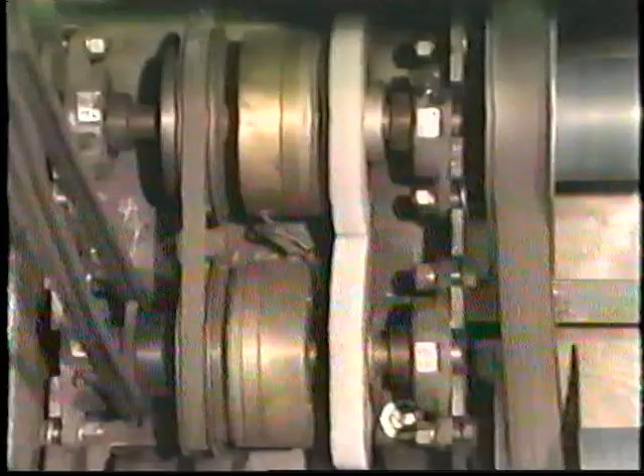The V-belt drive has been around since the early 1900s and is the most widely used drive in industry. Over the years, it has proven to be very reliable, relatively inexpensive, and easy to set up and operate. But if the V-drive is carelessly installed and maintained, these advantages can disappear quickly.

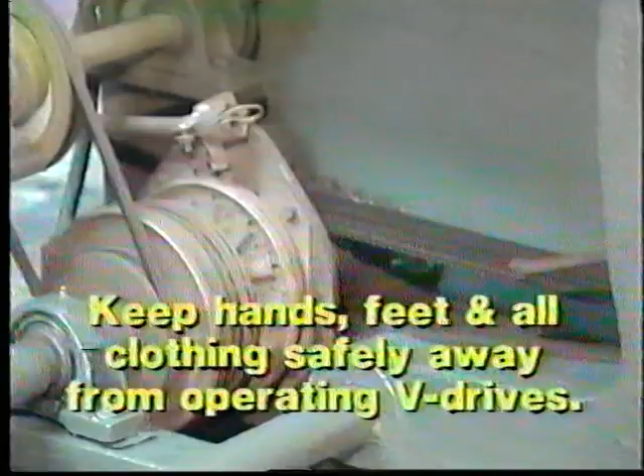We have removed a drive from the shop and brought it to an area where we can safely demonstrate its operating principles. Do not allow loose clothing, hands, or feet to stray near a drive that is operating or that could start without warning. Many people have been pulled into machinery.

Okay, let's take a look at how a V-belt works and why careful maintenance is important. The V-belt transfers power from the driver, usually an electric motor, to the driven equipment. Both the driver and driven equipment have pulleys or sheaves mounted on their shafts.

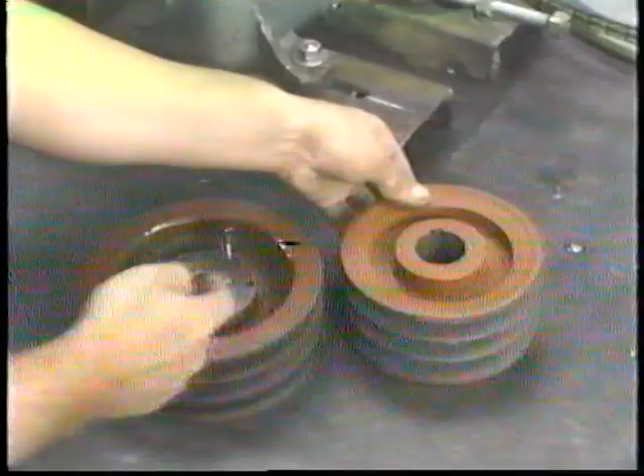Sheaves may have a fixed bore, which must be matched to the individual shaft, or they may be used with separate bushings which allow the sheave to be adapted to different shaft diameters. Let's take a closer look and see how a belt and sheave work together to transfer power.

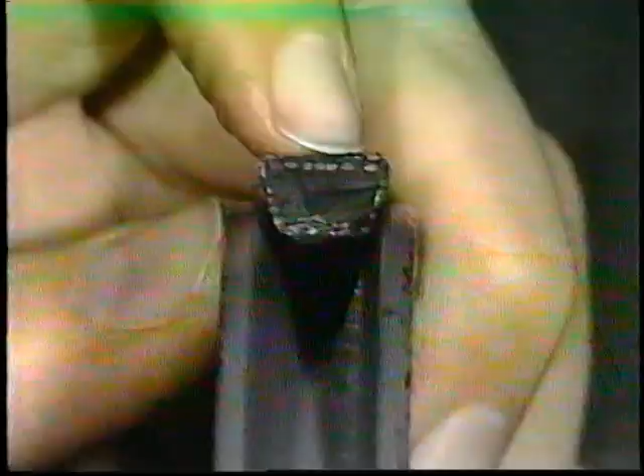A V-belt gets its gripping power by wedging against the sides of the sheave when the belt is forced down into the sheave groove. The belt is forced deeper into the groove by increasing belt tension. This is done by increasing the drive's center distance, which usually means moving the driver and driven equipment further apart.

Sometimes an idler is used to adjust the tension in a drive. By using the idler pulley to apply force to the belts, the effect is the same as moving the driver and driven equipment further apart. Both changing the center distance and moving the idler allow you to increase or decrease belt tension.

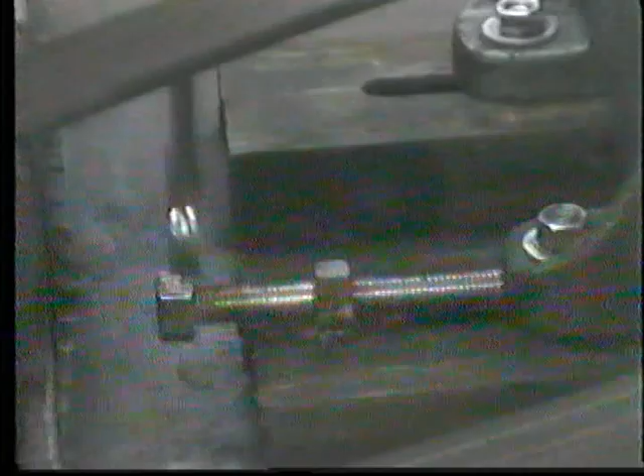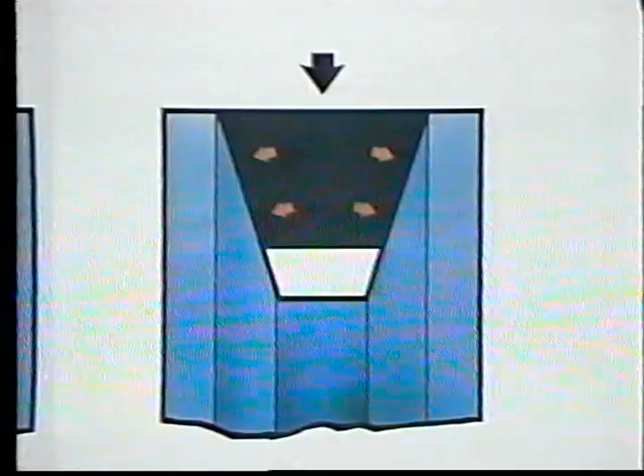When increased tension is applied to the belt, it will wedge deeper into the groove and push harder against the sides of the sheave. The harder the belt pushes against the sheave, the more gripping power there is and the less tendency there will be for the belt to slip when transferring power.

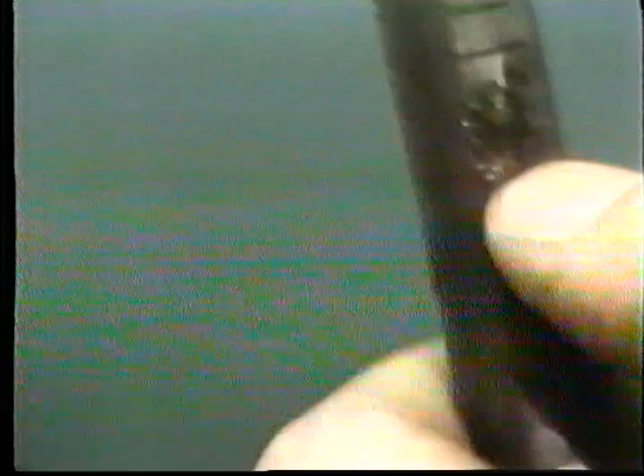If the belt does slip, the wasted power is turned into heat, which can break down the V-belt construction material and cause early belt failure. Belt slippage is by far the most common cause of belt failure and wasted power.

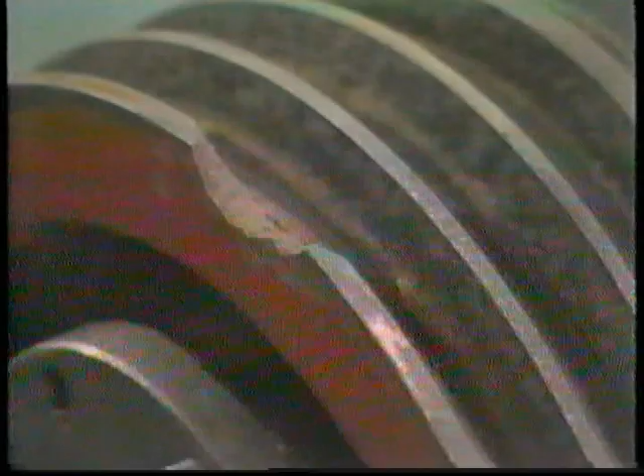But the condition of the sheaves and their alignment can also affect belt wear. If the sheave has burrs or rough spots, the belt will be gouged and will have a reduced service life. If the drive is misaligned, the load will not be distributed evenly across the belt. As a result, some parts of the belt will wear faster than others, and the belt will fail sooner than it should.

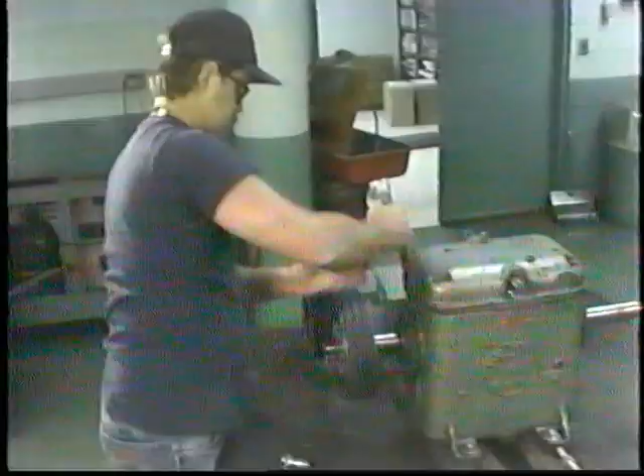Okay, it is important to understand that a V-belt's gripping power is directly related to belt tension. If we want to transfer a certain amount of power without the belt slipping, we need to provide the right amount of belt tension. Suppose that this drive needs a total of 210 pounds of tension to transmit power without belt slippage. Since there are 3 belts, this means that each belt needs to supply 70 pounds of tension.

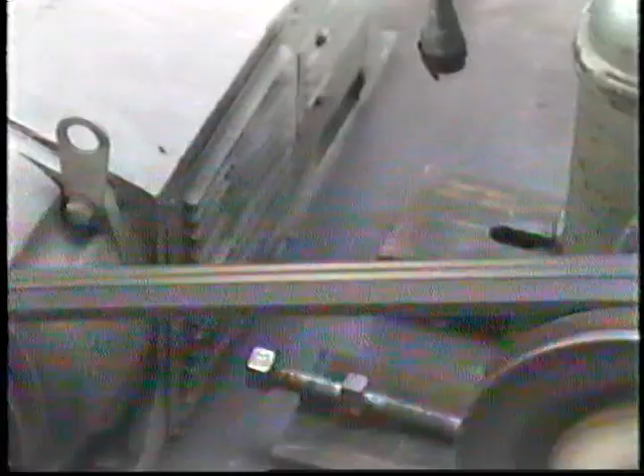When one of the belts is worn and can no longer withstand 70 pounds of tension, it fails. And when it does, the 2 remaining belts will still be supplying only 70 pounds of tension each. And since 140 pounds of total tension is not enough to turn the driven unit, the belts will begin to slip. Now, in this situation, there are 3 ways to come up with the necessary 210 pounds of total tension.

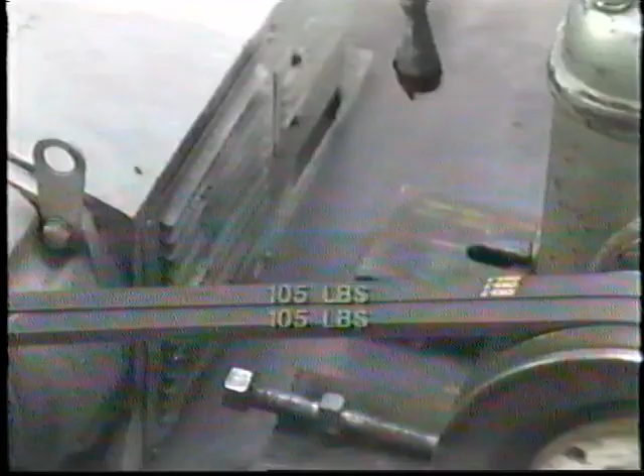First, if you're in a hurry and also want to get every bit of service from the belts, you could simply retension the 2 remaining belts. But they must now each supply 105 pounds of tension to make up for the missing belt. And chances are they weren't designed to take the extra load. Plan on some future downtime because they will probably fail soon.

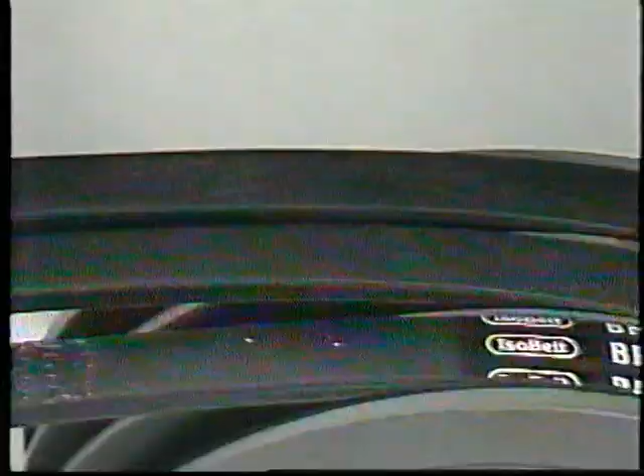Secondly, you might be tempted to simply add a new belt to the drive. But when the new unstretched belt is tensioned, the old belts, which have stretched, will be hardly tight at all and will transmit very little power. The new belt will have to bear most of the load.

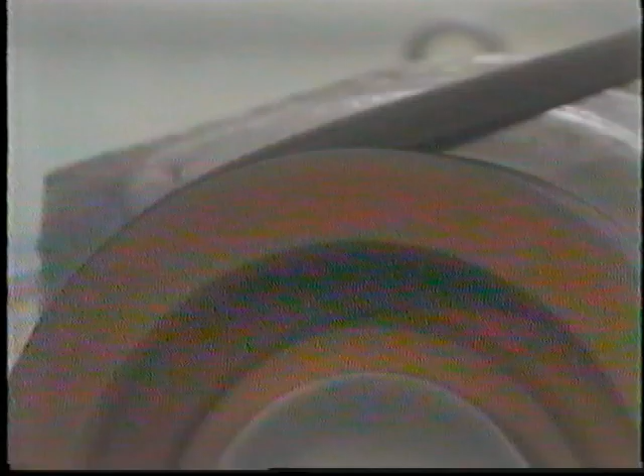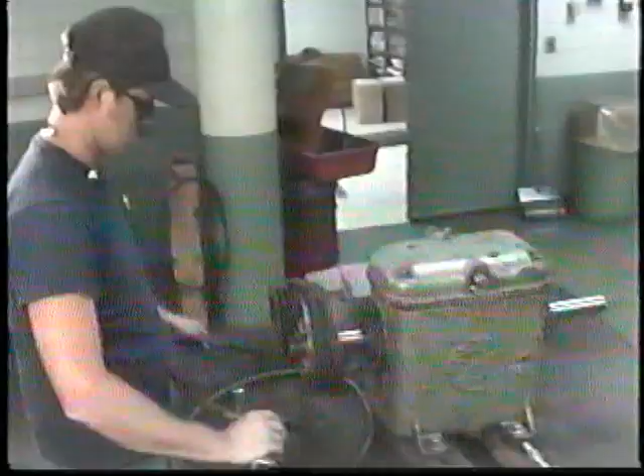If you tension the new belt normally, the drive will have little more than 70 pounds of total tension, and the new belt will certainly slip. If you try to eliminate the slippage by over-tensioning, the new belt will have to provide the entire 210 pounds of tension. In either case, the new belt will fail quickly, and you'll be back to where you started. The third possibility, changing all the belts, often turns out to be the most practical.

If the belts are replaced as a set, they should all wear at about the same rate, and each will be pulling its share of the load. In the long run, you can reduce the number of times a drive needs to be shut down for belt replacement if the entire set is replaced.

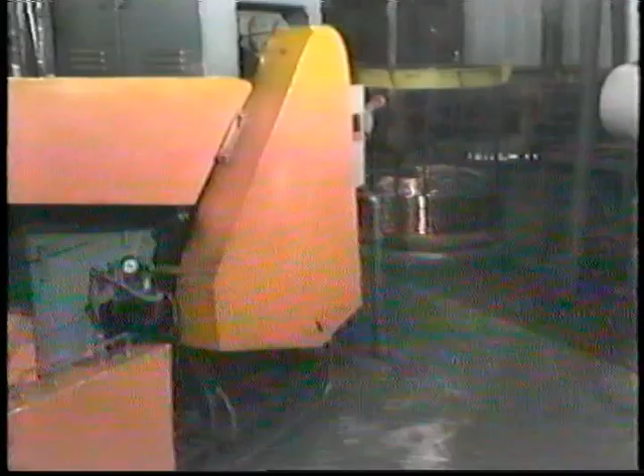Now, as we replace the set of belts on this drive, we're going to pay close attention to the sheaves and their alignment. Then we will concentrate on tensioning the belts correctly. Some of the procedures we will show may be difficult to perform on some of your drives, but if you are able to adapt them to your situation, your efforts will pay off in increased belt life and reduced downtime.

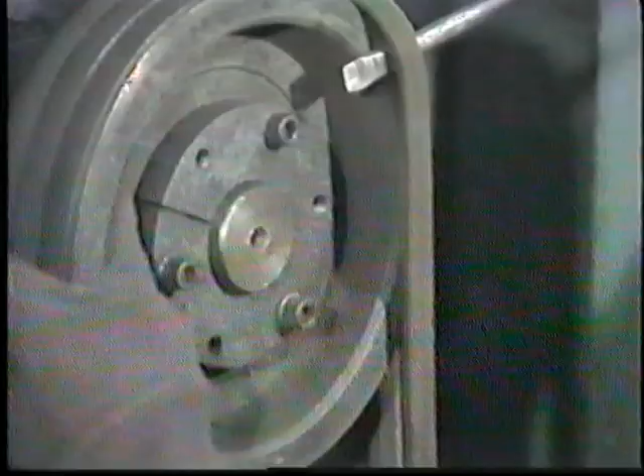The first step, before doing anything else, is to shut off the drive and electrically lock it out. Then make sure to remove the old belts correctly. Never pry the belts off with a screwdriver, which might slip and injure you. Instead, shorten the distance between the sheaves until the belts can be slipped off easily by hand.

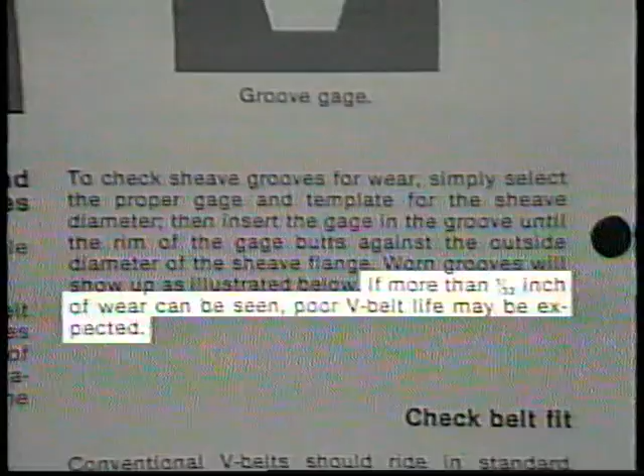As we've said, it's important that the sheaves be in good shape. Check to see if there are burrs or anything else on the sheave groove which might damage the belt. Using a gauge, which is often available from your vendor, check sheave wear to make sure the groove is not dished out and allowing the belt to slip. Follow the manufacturer's recommendations for how much wear is acceptable and when the sheave must be replaced.

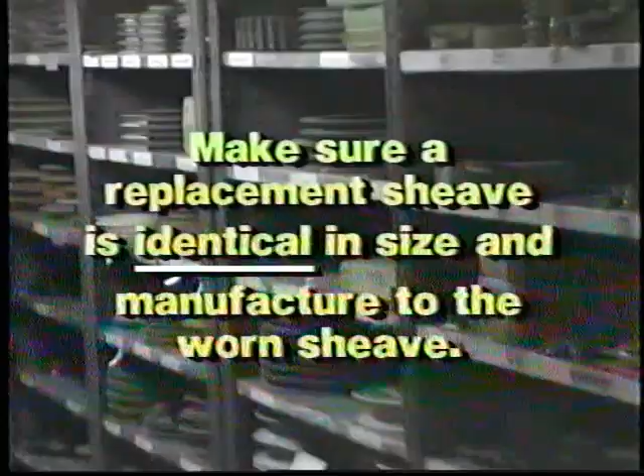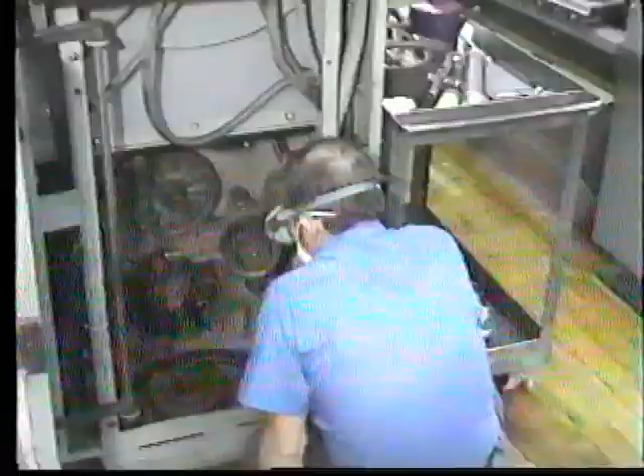Just because the sheave is new, don't assume it's in perfect shape. Check the inside of the sheave hub and the groove for defects. Also, if you're using a bushing, take a look at its tapered surface to make sure it's smooth and won't damage your sheaves. With the key in place, slide the sheave and bushing along the shaft and place the unit where it looks like it will be aligned properly with the remaining sheave.

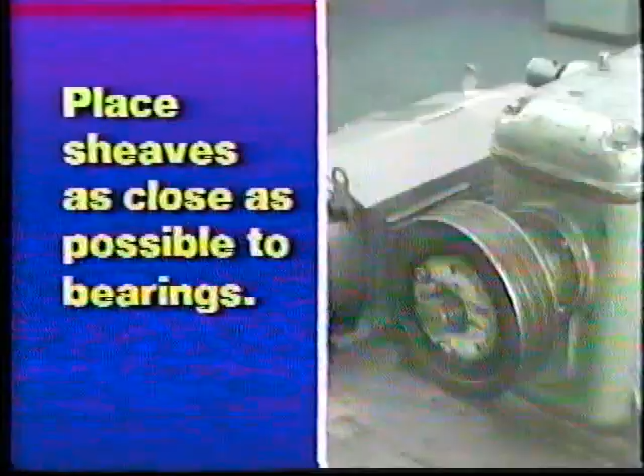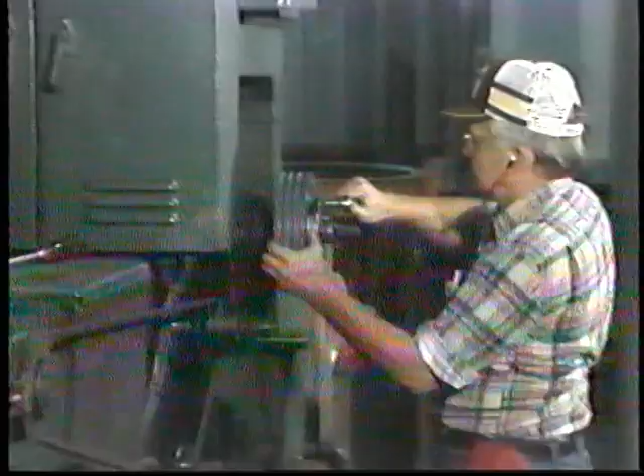If both sheaves were removed, use these two general guidelines for sheave placement. First, the sheaves must clear the rest of the machinery and the belt guard. Secondly, the sheave should be placed as close to the bearing as possible in order to reduce overhung load. Overhung load refers to the lever effect on the bearing if a sheave is placed far out on the shaft. If you have any doubts about placement, it's usually safest to place the sheaves along the shaft exactly where the old ones were. Then snug up the mounting screws.

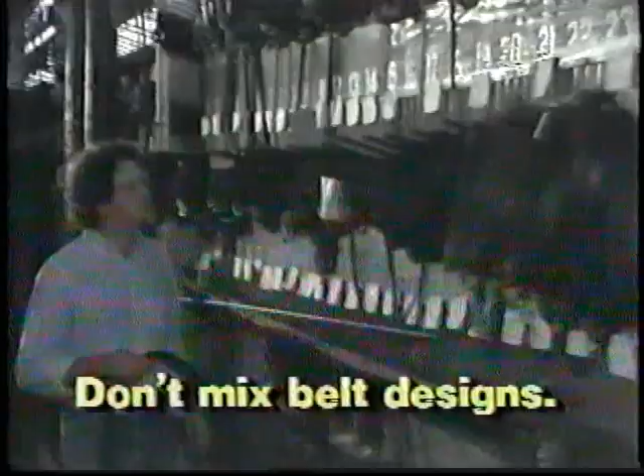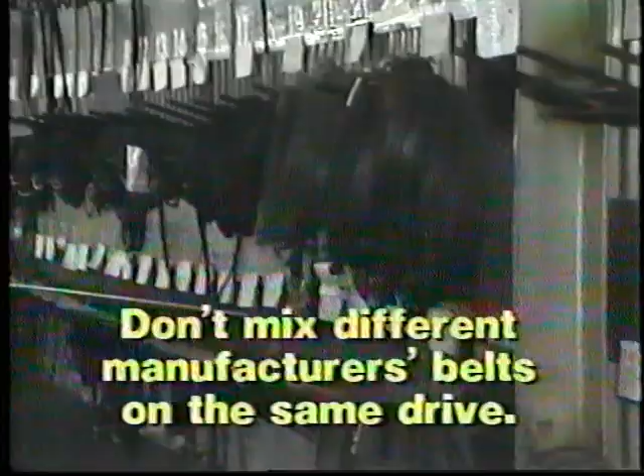Now, before we go on to aligning the drive, let's see how to make sure you'll be putting on the right belts. When selecting replacement belts, there are three important things to avoid. First, don't mix belts of different design on the same drive. Secondly, don't change one belt design for another without checking with your supervisor. And finally, don't mix different manufacturers' belts on the same drive, even if they appear to be the same size and of the same design. It is safest to replace worn or failed belts with new belts which have the same identification markings.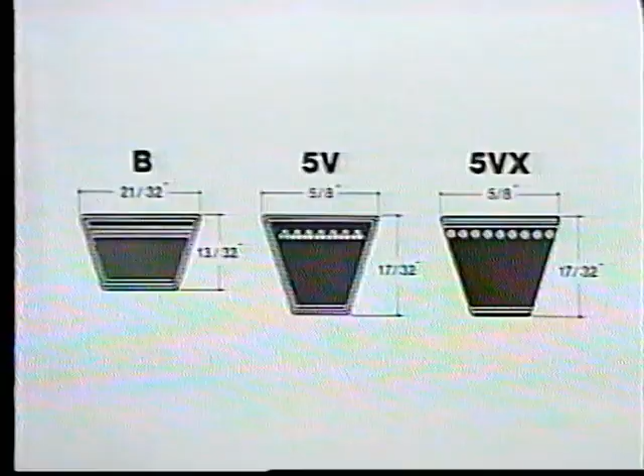Let's take a moment to look at some of the differences in design and construction that you might run into and why it's important to install identical replacements. There are three common belt designs: the conventional or classical belt, the narrow belt, and the raw edge belt. The conventional belt is still the most common and is sized A through E. The narrow belt has a thicker profile than the conventional belt and has a V in its number. Narrow belts are sized 3, 5, and 8. Narrow and conventional belts are not interchangeable. In fact, the narrow belt requires a different sheave for its use.

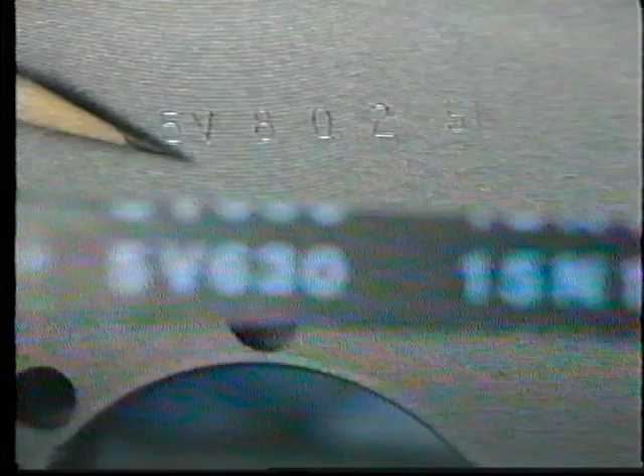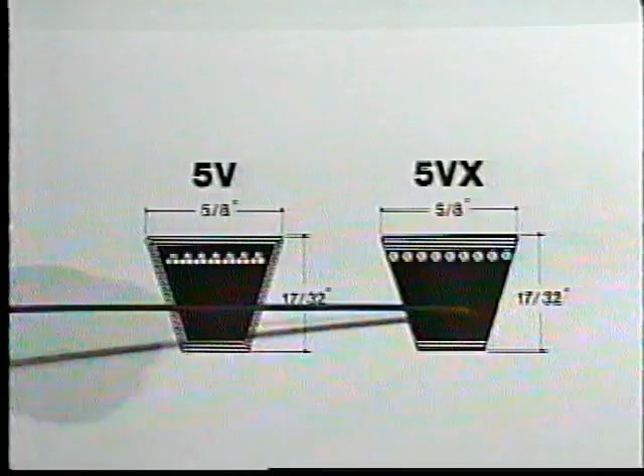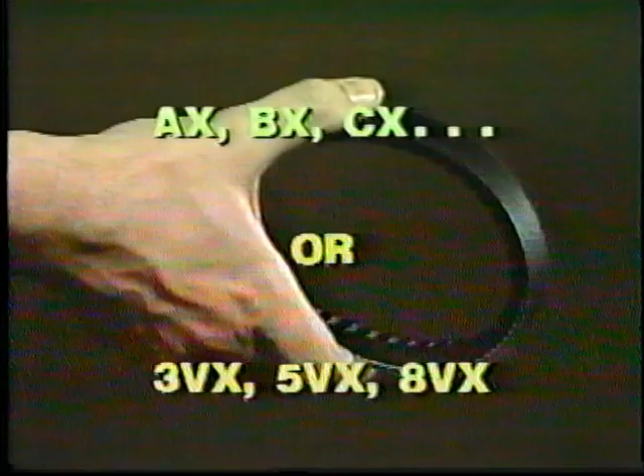Both conventional and narrow belts have an outer jacket made of rubberized cotton or man-made fibers. This jacket helps protect the belt from abrasion and from occasional contact with oil. Raw edge belts, on the other hand, do not have this protective covering all the way around the belt. Instead, they often have a greater load capacity and bend more easily around small sheaves. These belts are sized to fit either conventional or narrow belt sheaves and have an X in their ID number. Because raw edge belts do not have a protective cover, they may be more easily affected by their operating environment.

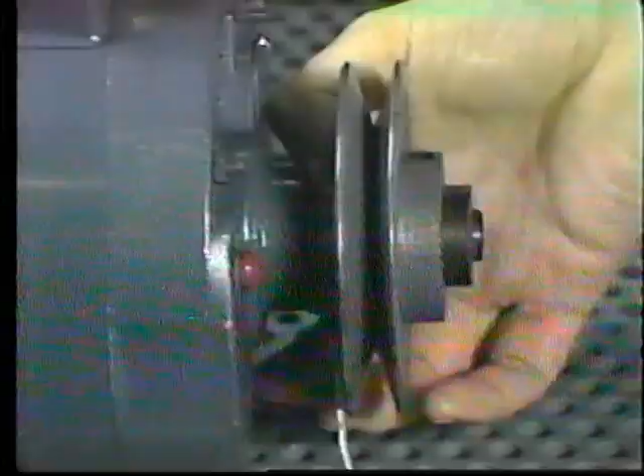A final and very important reason not to mix belt designs or belts from different manufacturers is that they may require different amounts of tension. The result may be that when placed on the same drive, some belts may be over-tensioned while others remain under-tensioned. Now, when it comes to aligning the drive, if possible, perform the alignment before torquing down the cap screws and installing the belts.

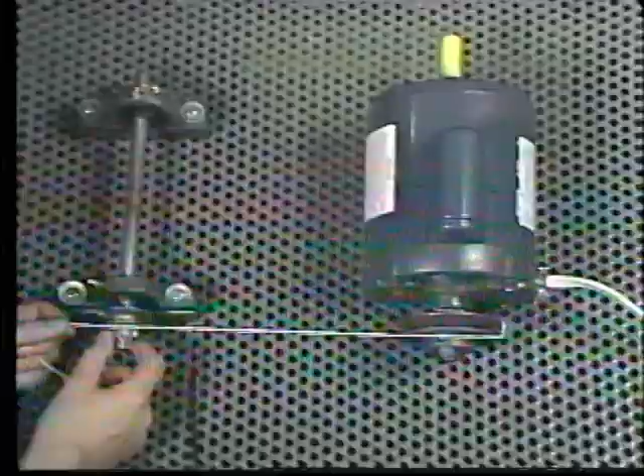First of all, this will allow you to make small alignment adjustments to a sheave instead of moving the driver and risking a major realignment. Second, the alignment process is usually easier if you don't have belts pulling against the sheave while you're trying to move it. But in some situations, the driver must be moved back to its operating position before the alignment will be close enough to check.

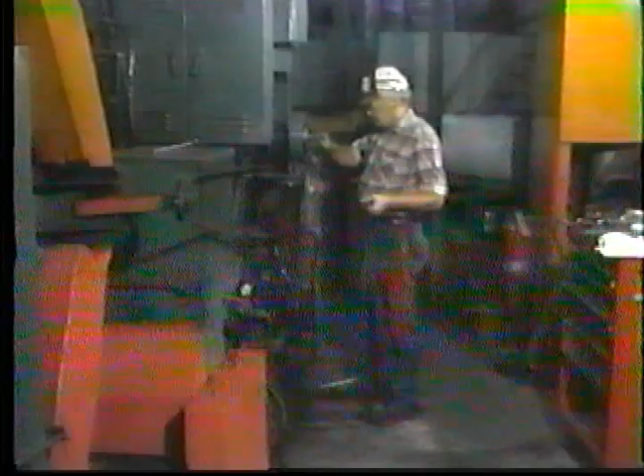So you'll have to put the belts on first. In this case, torque the sheave cap screws to the manufacturer's specifications. Then put the new belts on while the center distance is shorter. In fact, you may find that even though you have already shortened the center distance to remove the old belts, you may have to further adjust the drive.

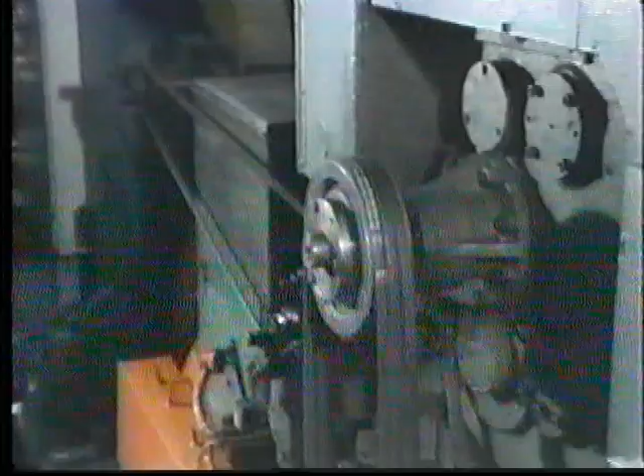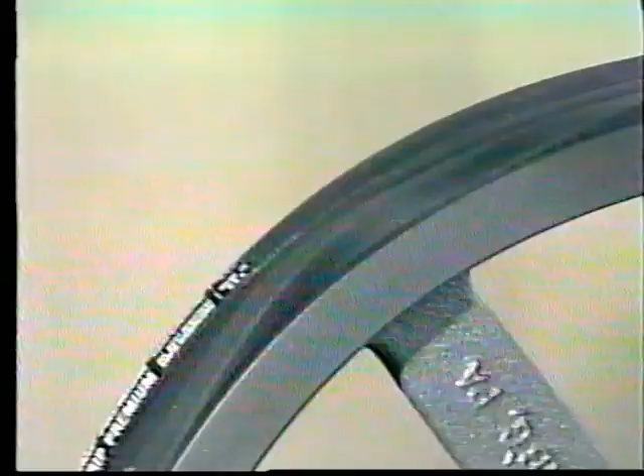In order to slip the new, unstretched belts over the sheaves by hand. It is absolutely essential that new belts not be forced onto a drive by using a screwdriver or any other means. If the belts are forced on, there's a good chance the tension cord in the belt will be damaged in the process. Tension cords carry the load and provide the belt's strength. If the cord is damaged or stretched when installing, the belt quickly becomes useless. Belt turnover is often caused by broken or damaged tension cords.

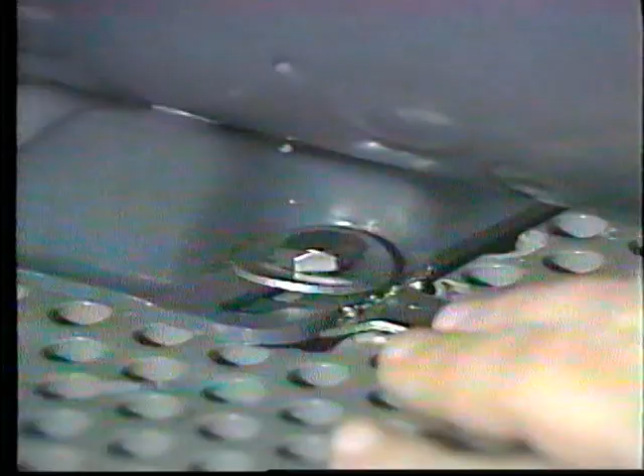Now, one of the advantages of the V-Drive is that it does not require exacting alignment techniques, which is a good thing, because aligning a V-Drive perfectly can be very tricky. But it's worth the time to come as close as you can. The better the alignment, the longer your belts, sheaves, and bearings will last.

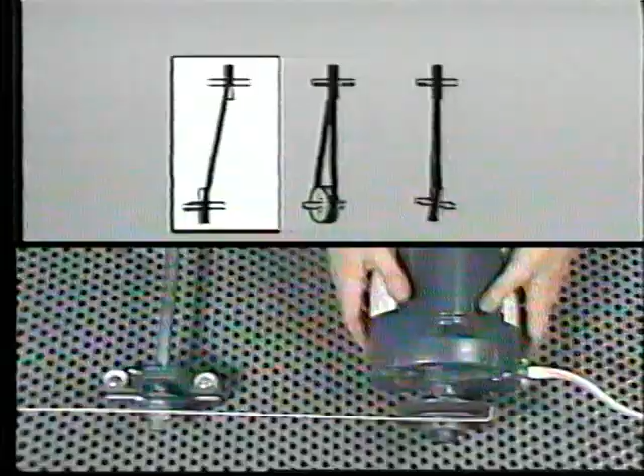These are the ways a V-Drive can be out of alignment. Usually, misalignment will be a combination of them. To correct for this kind, you'd move the motor forward or backward. For this kind, you'd shim the front or back. And for this, you'd rotate the motor.

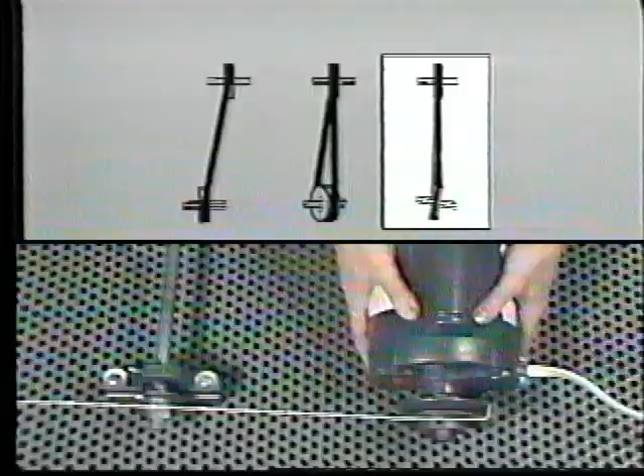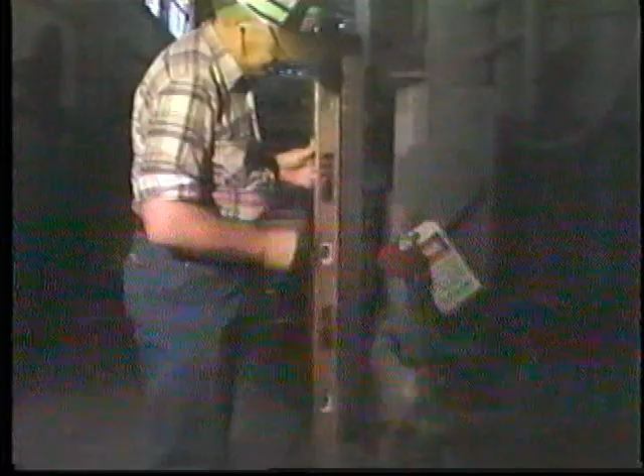To check the alignment, place a straight edge across the faces of the sheaves as near their centers as you can. The straight edge should touch the two outermost spots on each of the two sheaves. If it doesn't, move the motor in the proper directions to get the straight edge touching the sheaves properly. Then repeat the procedure on the other side of the hub. For example, if you took your first reading to the right of center, now do it again to the left.

If the straight edge does not touch the sheaves properly now, you will have to try another adjustment. Keep repeating this procedure, checking each side of the center and adjusting the motor until the straight edge touches correctly on both sides of the hub.

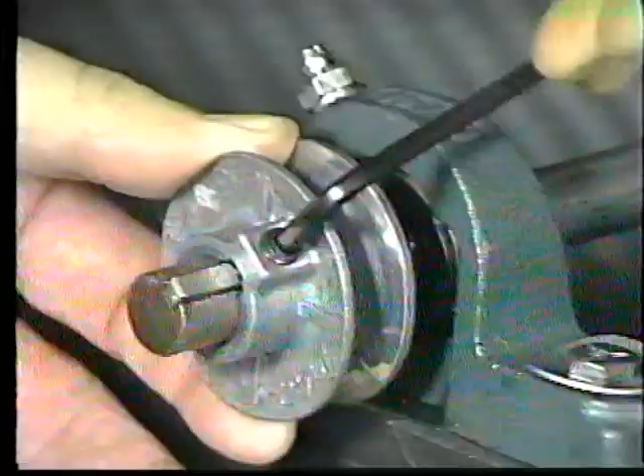Finally, rotate the sheaves a half revolution. The straight edge should still line up properly. If not, you probably have a wobbly sheave or even a bent shaft. When you're satisfied the drive is aligned, tighten down the motor hold-down bolts. Then torque the sheave cap screws to the manufacturer's specifications if you have not done so already.

Now we are ready to tackle the single most important V-Drive maintenance procedure: applying the correct belt tension. If you don't get this right, much of your effort up till now will be wasted. From what has been said so far, you might think that the tighter the belt, the better. After all, the greater the tension, the greater the gripping power.

But unfortunately, belt tension also affects the bearings found in the driver and driven equipment. Increasing the belt tension not only increases gripping power, it also increases bearing strain. The farther the shafts are forced apart to increase belt tension, the more the belts are going to pull on the shafts and against the bearings.

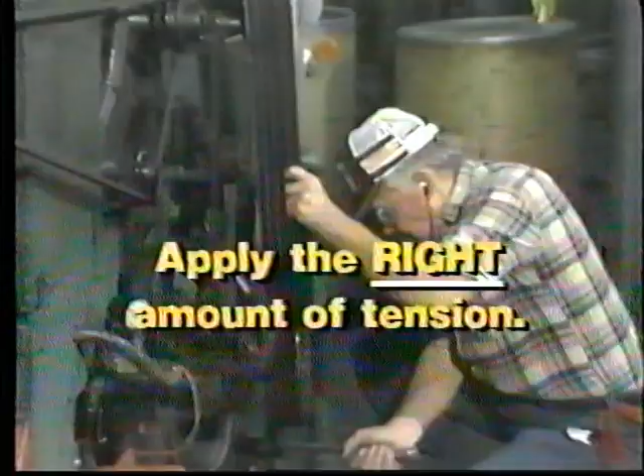The correct belt tension strikes a balance. The belt needs a certain amount of tension in order to transfer power without slipping, but not too much or the bearings won't last. The trick is to apply the right amount of tension to the belt, not too much and not too little.

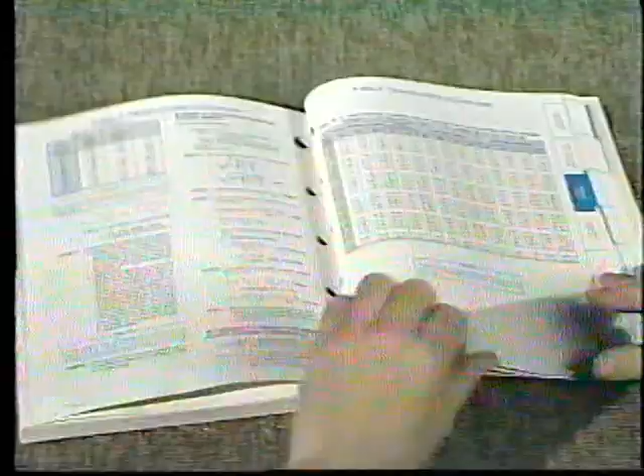You have already seen a couple of the more popular methods of coming up with the right belt tension. There are several other methods. Some of them work better than others, but they all depend on years of experience. The problem is, even experienced people may have trouble adjusting their methods to the greater tensions that must be applied to today's belts, particularly the narrow and raw edge belts. Many belt experts have different opinions on the second best way to come up with the right belt tension.

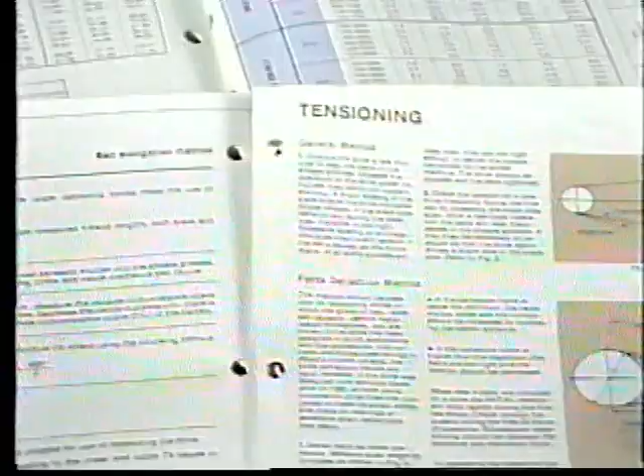But they do agree that the best way is called the force deflection method. The force deflection method makes use of formulas which relate the actual belt tension required to transmit a load to the amount of force it takes to deflect a belt after it has been installed and tensioned. Fortunately, most manufacturers have done the math for you.

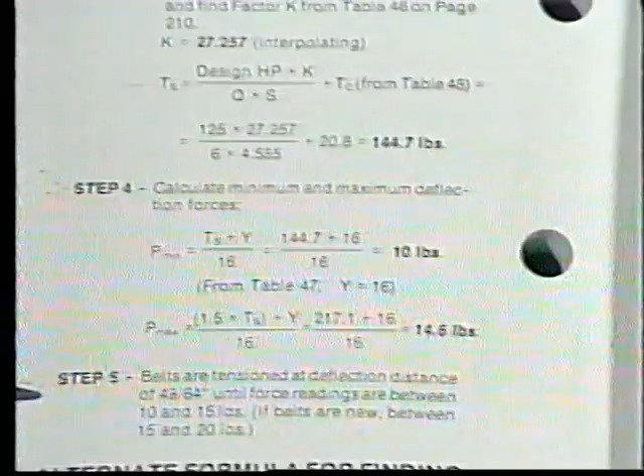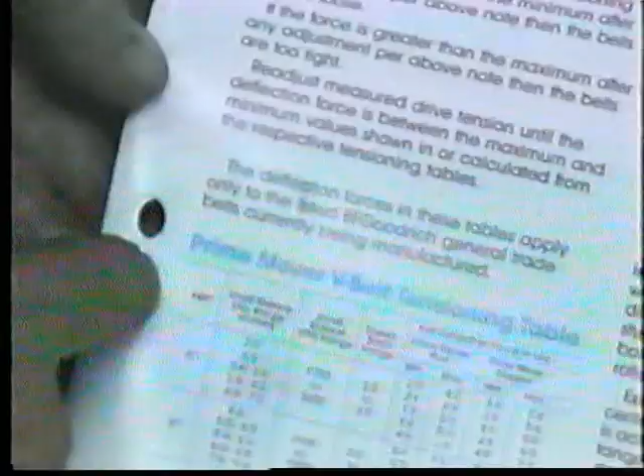You will need a tape measure, a spring scale, and the belt manufacturer's instructions. Carefully follow the manufacturer's instructions and make sure that they actually apply to your situation. Before using the force deflection method and the manufacturer's charts, you must be certain that the correct type and correct number of belts are being used on your drive to avoid overloading the bearings.

If for any reason you cannot use the force deflection method, contact the manufacturer directly for the proper way to tension your drive. When you can use the force deflection method, the procedure will usually follow this general pattern.

First, apply a preliminary amount of tension. A good rule of thumb is to apply enough tension so that the belts have a live, springy feel when struck with a hand or pushed down with a thumb.

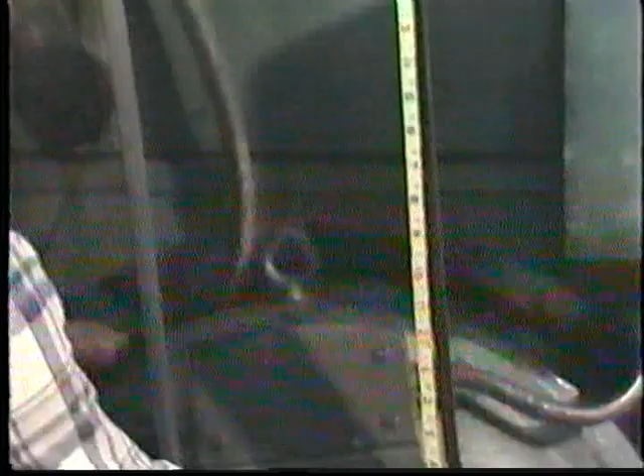Then measure the belt span length, the distance on the belt between the two points where the belt first contacts each sheave. You're measuring to the nearest inch, so don't worry about finding the exact contact points.

Now we'll use the span length to find out how much we're going to deflect the belt to get the right tension. Using a spring scale, apply enough force in the center of one belt to deflect the belt 1/64 of an inch for every inch of belt span.

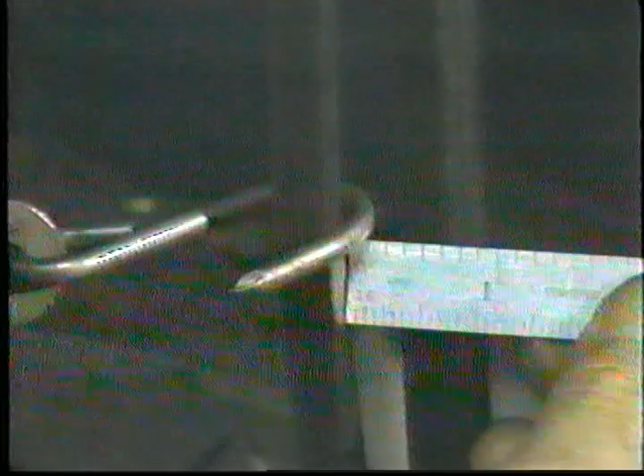If the belt span came out to be 32 inches long, then move the belt 32/64, or 1/2 inch, with the spring scale. Read the amount of force it takes to do that on the scale.

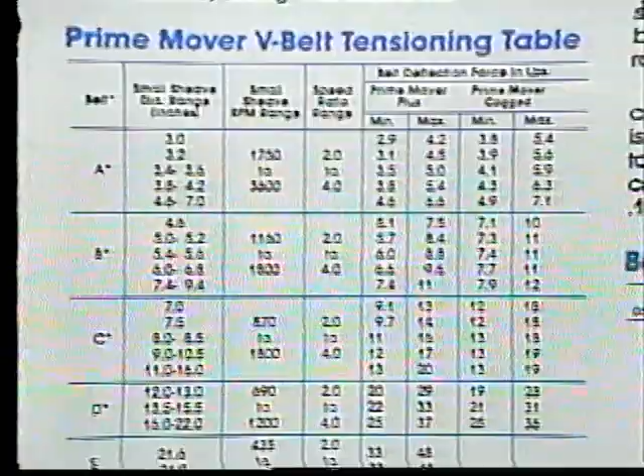Then compare this reading with those suggested by the manufacturer. As you can see, the chart will often give a range within which your reading should fall.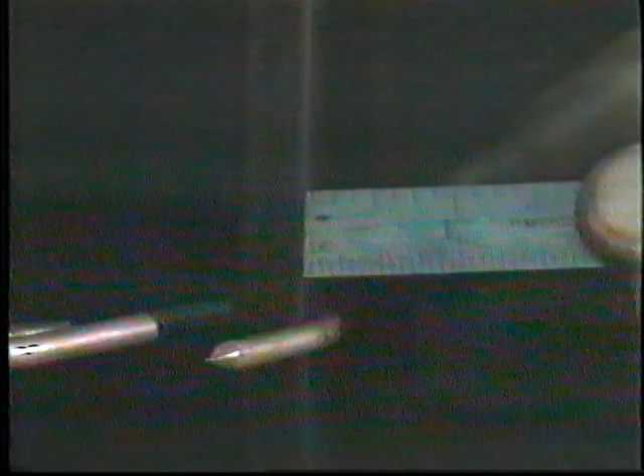By changing the distance between the sheaves, adjust the tension to fall between the values given by the manufacturer. Depending on the drive setup, you may need to adjust a motor mount screw. But if you have to loosen motor base bolts to apply tension to the belts, the job is going to be tougher because retensioning may affect the alignment.

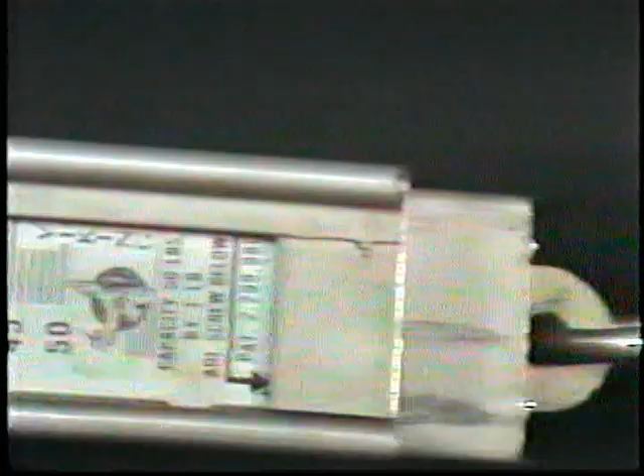Regardless of which mounting method you are using, once the proper tension has been set, make a final alignment check. When you're satisfied with the alignment and belt tension, remember to replace the belt guard before starting the drive.

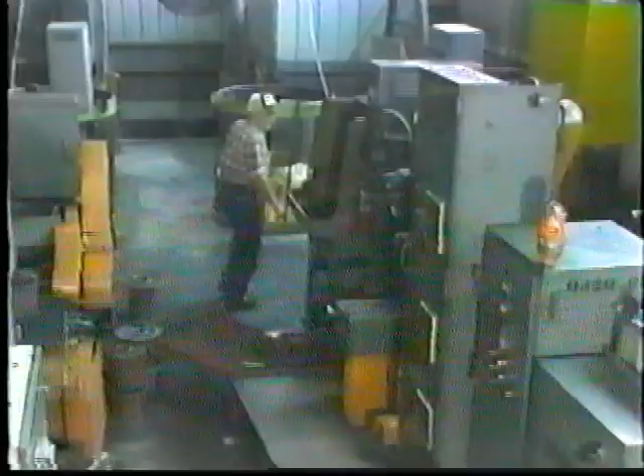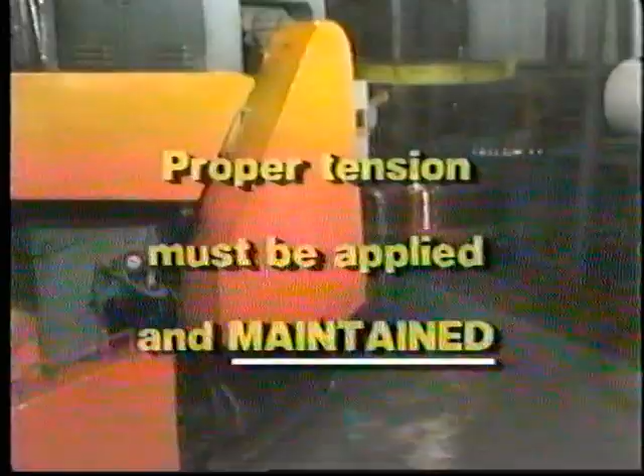Now you've inspected the sheaves, the drive has been aligned, and the belts have been properly tensioned. Much of the job is done, but it isn't finished. Once seated and under a load, the belts will now stretch and the tension will be reduced. If the V-drive is to do its job without wasting power and wasting belts, proper tension must not only be applied, it must also be maintained.

Belts will stretch the most in the first few hours of operation. Listen for belt squeal. If they are squealing, the belts are slipping because they're too loose. Stop the drive, lock it out, and tighten the belts.

Do not use belt dressing to quiet them. Belt dressing can break down the belt material without solving the problem. Slipping belts need to be tightened, not dressed.

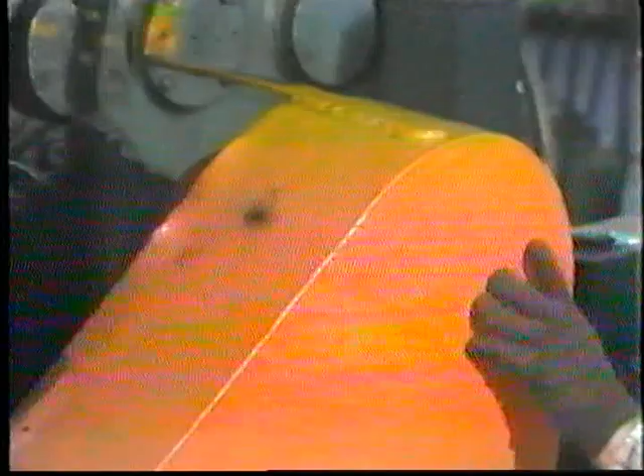After 24 hours, check the tension and retension the drive if necessary. Then check the tension again after 72 hours of operation. It's a good idea to make an occasional check even after that. The belt may still have up to 3% more stretch after the 72-hour break-in period.

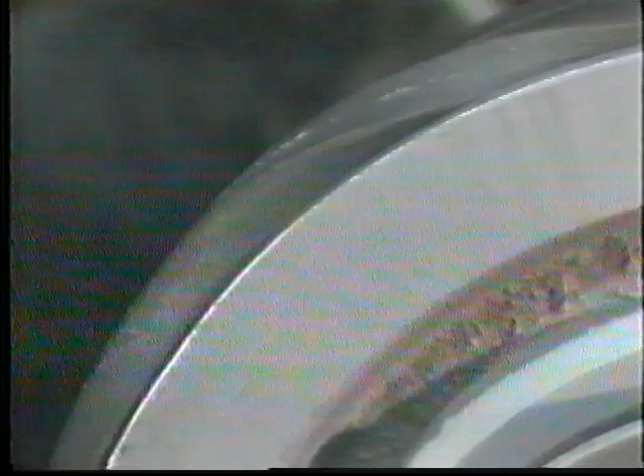Now, before we're through, let's see how we might troubleshoot a drive that's going through a lot of belts very quickly. If you're having a lot of trouble with belt turnover, there are two probable causes. First, someone may have changed the drive requirements without adding extra belts to carry the extra load. Sudden shock loads can cause belt turnover when there are not enough belts to provide enough tension in the drive.

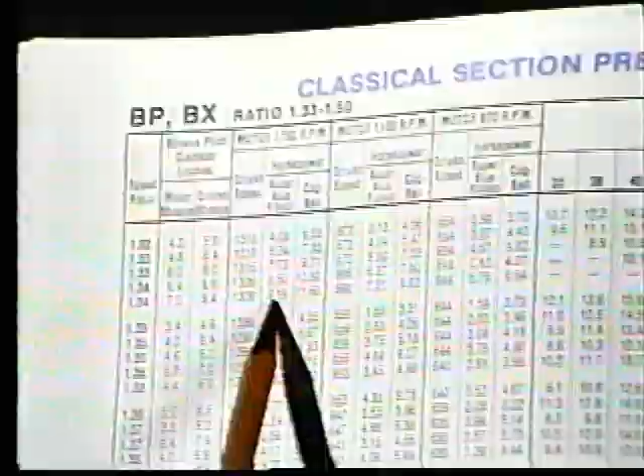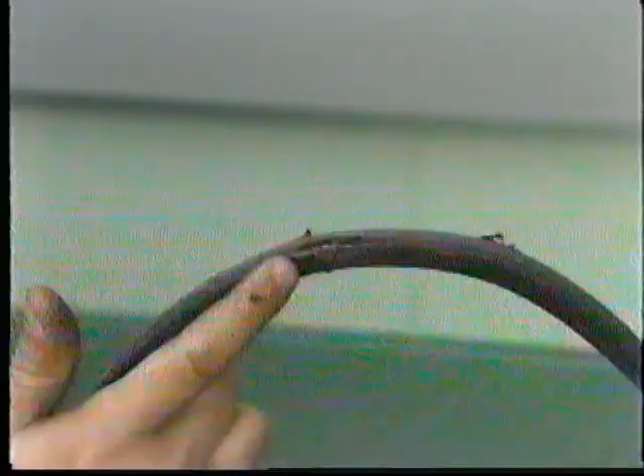If you suspect this situation, contact your supervisor or belt manufacturer and double-check the drive design. But the fact is, improper maintenance is often responsible for belt problems. We've already seen that prying a belt on can cause belt turnover. So check the belts to see if there's any evidence of this, like gouges on the jacket. And if so, find out who is causing the problem.

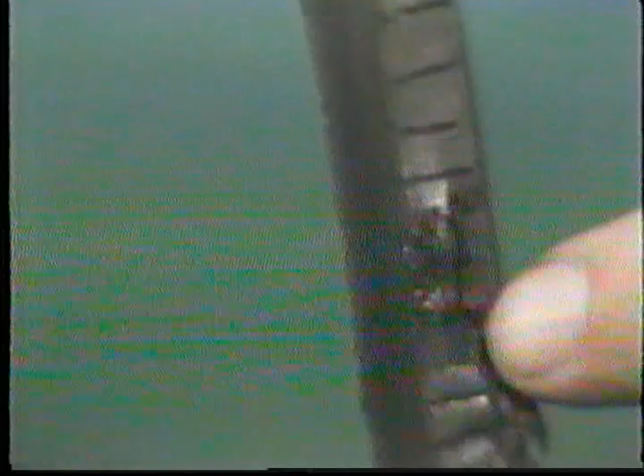The condition of a belt's jacket can tell you a lot about what the belt has gone through. If the belt is dry, cracked, and brittle, the belt has gotten too hot. Heat can break down belt material.

If a belt has been slipping, it will appear glazed along its sides. Make sure that the correct tension is being maintained in the drive. If you are unable to maintain the correct tension, have the drive design checked.

If the jacket appears gummy, then the belt is in contact with oil, or someone is using belt dressing on the belt. Both of these materials can eat away at the belt's protective jacket.

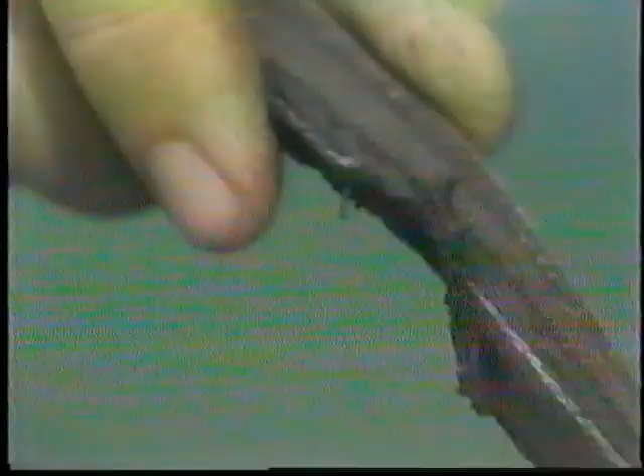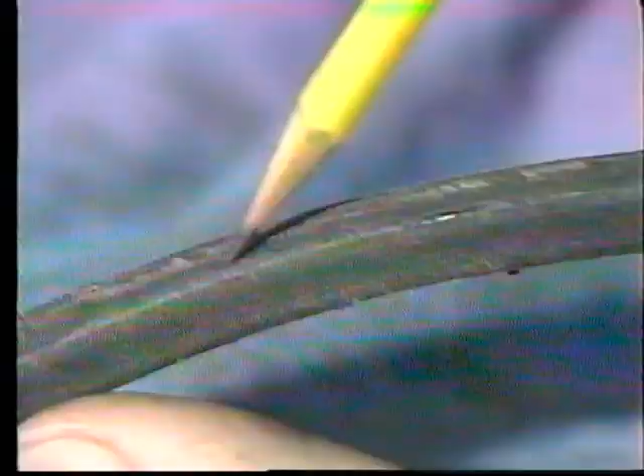Finally, if the jacket is chewed up or shows uneven wear along its surface, there are two likely causes. Material can be falling into the drive and gouging the belts, or the sheaves may be in bad condition or out of alignment. The V-belt drive has been a workhorse of industry for over a half a century, and a good deal of time and effort have been spent to improve it.

But it is up to you to apply your time and skill to V-belt maintenance, or the improvements are wasted. Drive alignment and sheave condition are important to prolong belt life. Use the right belts on a drive. Apply and maintain the correct belt tension.

Belt tension can affect V-drive performance more than anything else. I'm Dave Brown for Teletrain.